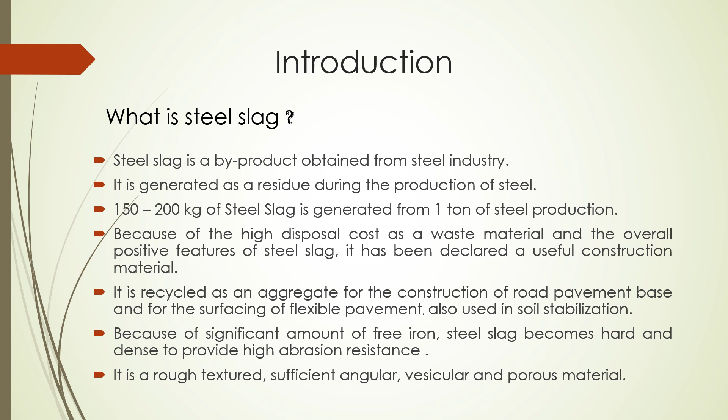Because of the high disposal cost as a waste material and the overall positive feature of steel slag, it has been declared a useful construction material. It is recycled as an aggregate for the construction of road pavement base and for the surfacing of flexible pavement. It is also used in soil stabilization. Because of significant amount of free iron, steel slag becomes hard and dense to provide high abrasion resistance. It is a rough textured, sufficiently angular, vesicular and porous material.

Steel slag aggregate. Let's discuss about aggregate properties. The properties that have to be evaluated for the suitability of slag as an aggregate relate to the chemical, physical and mechanical nature of the material. Let us discuss about some aggregate properties. Hardness. Hardness is the ability of a material to resist deformation, which is determined by a standard test where the surface resistance to indentation is measured. The most commonly used hardness tests are defined by the shape or type of indent, the size, and the amount of load applied.

Toughness. Toughness means resistance against impact load. In material science and metallurgy, toughness is the ability of a material to absorb energy and plastically deform without fracturing. Toughness is the strength with which the material opposes rupture.

The second one is high fines aggregate crushing test. The aggregate crushing test gives a relative measure of the resistance of an aggregate to crushing under a gradually applied compressive load. Third one is low aggregate crushing value. And fourth one is low Los Angeles abrasion value. Los Angeles is the apparatus that is used to measure the hardness. Next one indicates high density and crushing strength of the steel slag aggregate, because it is obtained from the steel industry. So its density is very high and its crushing strength is already good.

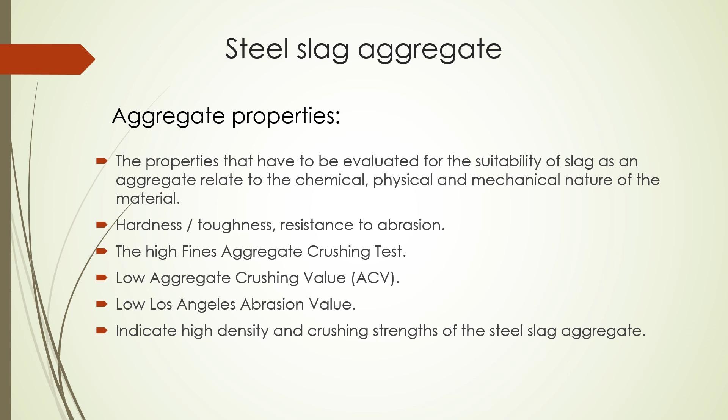Some other properties. First one is durability. Durability is the ability of a physical product to remain functional without requiring excessive maintenance or repair when faced with the challenge of normal operation over its design lifetime. Next one is resistance to stripping. Stripping is the separation of the asphalt binder film from the aggregate surface due to the action of water. Since steel slag has rough surface texture, that's why it improves the stripping resistance. This is very important in the prevention of the stripping of the binder and moisture damage.

Next one, steel slag with a pH of between 8 and 10 has a strong affinity to bitumen and therefore displays a greater degree of binder retention. Since we saw that its pH varies between 8 and 10, its nature is alkaline. That's why it has a strong affinity.

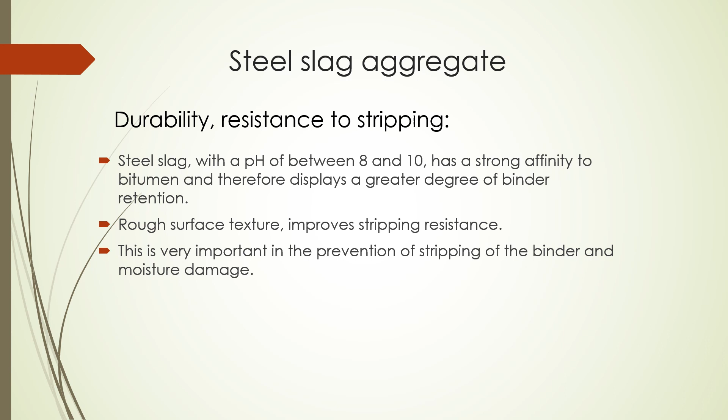These are some physical and mechanical properties of steel slag aggregate. The test conducted on bulk specific gravity: when the percentage of steel slag aggregate is zero, its value is 2.92, and when the percentage of steel slag aggregate is 50%, its value is 2.93. When the percentage of steel slag aggregate is 75, its value is 2.95. When the percentage of steel slag aggregate is 100%, the value of bulk specific gravity is 3.10. We see that bulk specific gravity increases with increment of percentage of steel slag aggregate.

Next test is absorption percentage. Its value is 2.3 when the percentage of steel slag aggregate is 0, and it increases up to 3.2 when the percentage of steel slag aggregate is 100. Next test is Los Angeles abrasion percentage. Its value is 14 when the percentage of steel slag aggregate is 0, and decreases up to 10 when the percentage of steel slag aggregate is 100. That represents the good hardening properties of steel slag as a road construction material.

Next test is flakiness percentage. Its value is 22.1 when the percentage of steel slag aggregate is 0, and it decreases up to 8.4 when the percentage of steel slag aggregate is 100%. And flakiness percentage should always be less than 15%. And we see that when the percentage of steel slag aggregate is increased, its value decreases. That is a good measure for a road construction material.

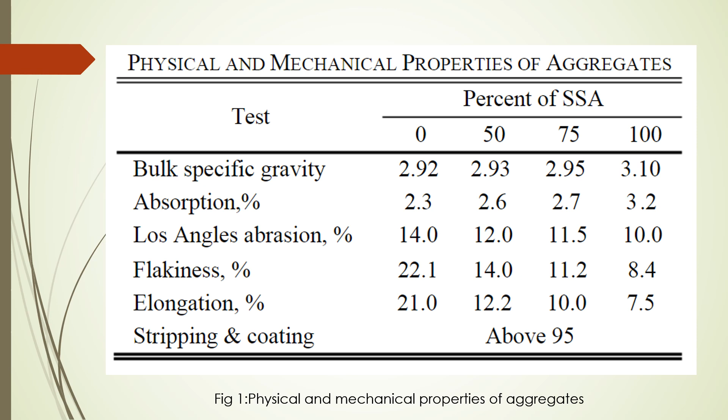Next test is elongation percentage. Its value is 21.0 when the percentage of steel slag aggregate is 0%, and it decreases up to 7.5 when the percentage of steel slag aggregate is 100%, and it should always be less than 15%. It is the same as flakiness percentage. Next one is stripping and coating. It is above 95. Here is the picture of steel slag aggregate, and we see that it has a vesicular structure.

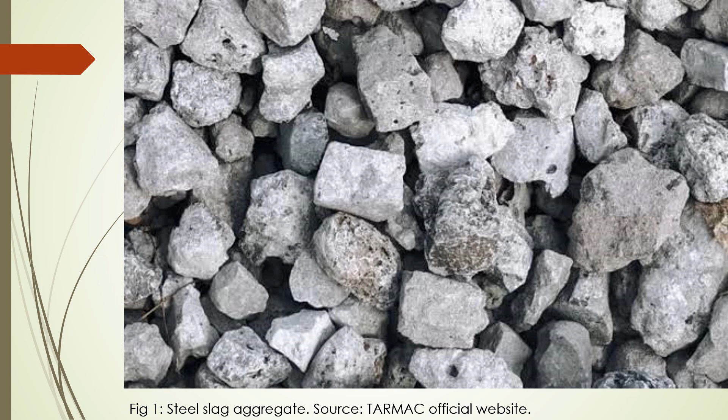Next one is steel slag asphalt mixture. Mix properties. Strength and stability. Since steel slag has a rough textured surface, high specific gravity, and proper interlocking due to angularity of steel slag aggregate, it results in better stability and resistance against rutting as well. It has a cubical shape, that's why the aggregate enables the formation of a strong interlocking structure within the asphalt mixture, which exhibits high stiffness and excellent resistance to permanent deformation.

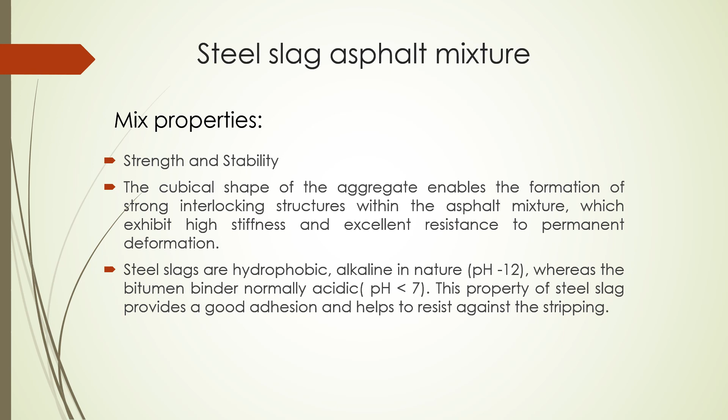Steel slag is hydrophobic and alkaline in nature, meaning its pH is approx 12, whereas bitumen binders are normally acidic, pH less than 7. This property of steel slag provides good adhesion and helps to resist stripping. Why do we need an alternative product? First one is change in traffic spectrum. Spectrum includes traffic data and the full range of street traffic data. Second one is change in traffic loading, meaning the total mass of passengers, luggage, cargo, including any non-revenue load.

Heavy traffic damage. That is rutting and shoving. What is rutting? Rutting is the formation of valleys in the surface or wearing course of asphalt roads and bridge decks. Shoving is a close cousin of rutting. Shoving is the presence of small mounds or ridges in the wearing course caused by horizontal stress. Intersections and highway off-ramps are common areas that exhibit shoving. Moisture damage means it has a good result in wet environments. And the next one is gradient.

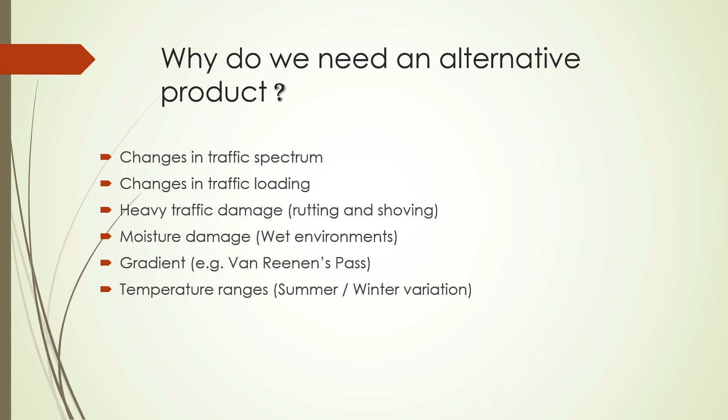And next, temperature range. It has a better result in summer as well as in winter season. When the road surface temperature begins to approach the softening point of bitumen, the high surface temperature causes the asphalt to become plastic and deform very easily, resulting in rutting. Whereas the heat retention property of steel slag is an advantage. That's why we use an alternative product. What are we hoping to achieve? First one is improved skid resistance, that is polished stone value.

Polished stone value of a coarse aggregate is an indicator that reflects the ability of coarse aggregate to resist the polishing action of tires and is used to characterize the ability of coarse aggregate to maintain a certain coefficient of friction against abrasion. SCRIM value. The full name of SCRIM is Sideway-force Coefficient Routine Investigation Machine. It is measured on various categories of road as well for 10 mm and 14 mm surface dressing. SCRIM value is used to measure the skid resistance.

Next one is it provides better stability and resistance against rutting. As compared to natural aggregate, it provides ideal durability, permeability, stability, and resistance against abrasion, cracking, and permanent deformation.

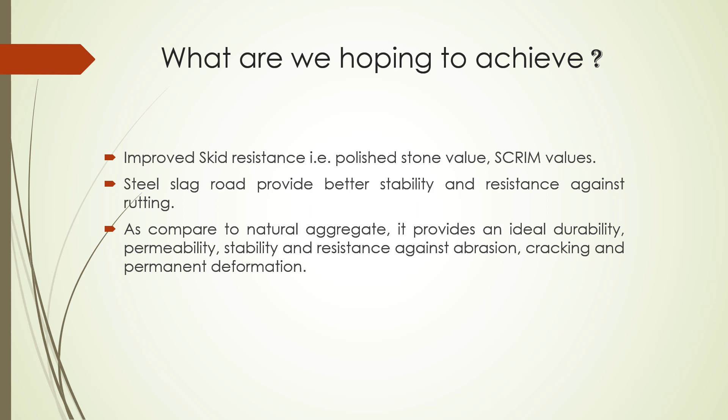Environmental consideration. Advantage. Since aggregate is obtained from natural rock, mining of the aggregate leads to the reduction of natural resource. The countries having limited resource of natural aggregate are thinking to save their natural resource for their future generation. A large area is utilized for the disposal of such solid waste produced by industries.

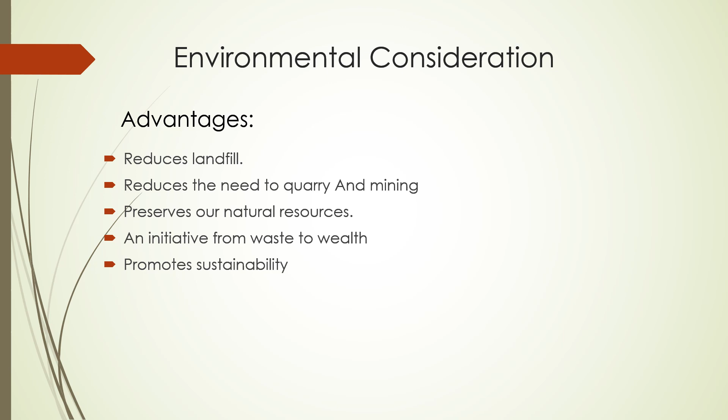Factors like environment, economic, technical, and efficiency of proper construction material have diverted the attention of researchers to other alternatives. As a result, they have explored a variety of recycled material which can be used in aggregate. And one of them was steel slag aggregate. It has various advantages, like it reduces landfill, reduces the need to quarry and mine, and preserves our natural resources. It is an initiative from waste to wealth and it promotes sustainability.

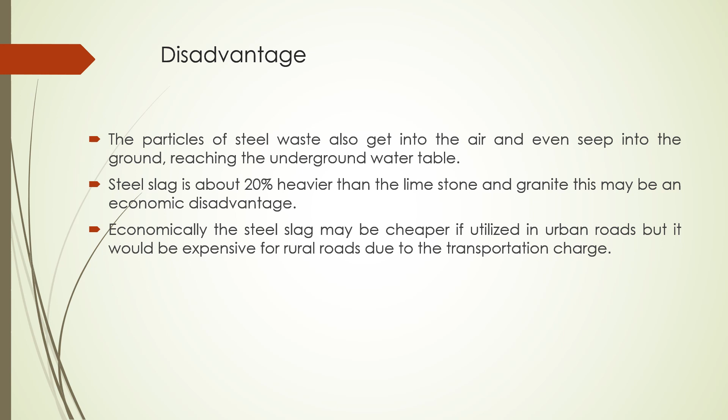Disadvantage. Steel slag has a negligible disadvantage as compared to its advantage. One of them is the particles of steel waste also get into the air and even seep into the ground, reaching the underground water table. Steel slag is about 20% heavier than limestone and granite. This may be an economic disadvantage. Economically, the steel slag may be cheaper if it is utilized in urban roads, but it would be expensive for rural roads due to transportation charges.

Let us see some case studies. First case study. It is conducted in Germany. According to the National Slag Association, iron and steel slag have been used in engineering construction for more than 150 years. It is being used as aggregate in replacement of natural aggregate, for bonding applications instead of Portland cement, fill material, railroad ballast, and subgrade soil stabilization. In 1998, up to 97% of the total generated steel slag was used in different ways for the construction of high traffic roads of Germany.

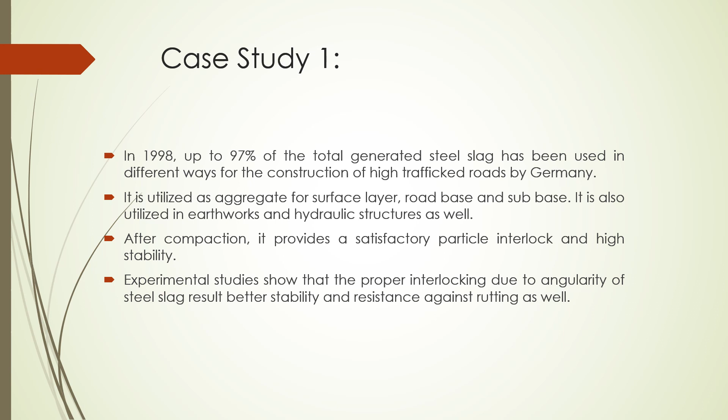It is utilized as aggregate for surface layers, road base, and sub base. It is also utilized in earthwork and hydraulic structures as well. After compaction, it provides satisfactory particle interlocking and high stability. Experimental studies showed that the proper interlocking due to angularity of steel slag results in better stability and resistance against rutting as well. It has various advantages, like proper skid resistance as well.

Second case study. It is conducted in Gujarat. In India, Surat has become the first city in the country to get a processed steel slag, means industrial waste, road built as part of a joint venture project by the Council of Scientific and Industrial Research, that is CSIR, Central Road Research Institute, that is CRRI, Union Ministry of Steel, Government, etc. 1 lakh ton of processed steel slag was used. Steel slag was collected from a manufacturing plant that is situated in Hazira. The road has been jointly made with CRRI, CSIR, and AMNS, means ArcelorMittal and Nippon Steel.

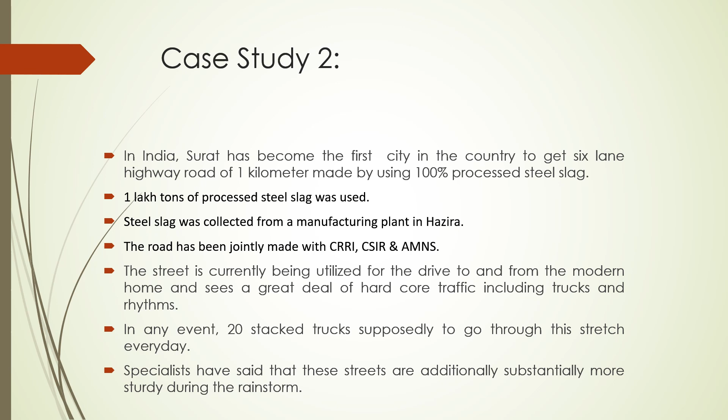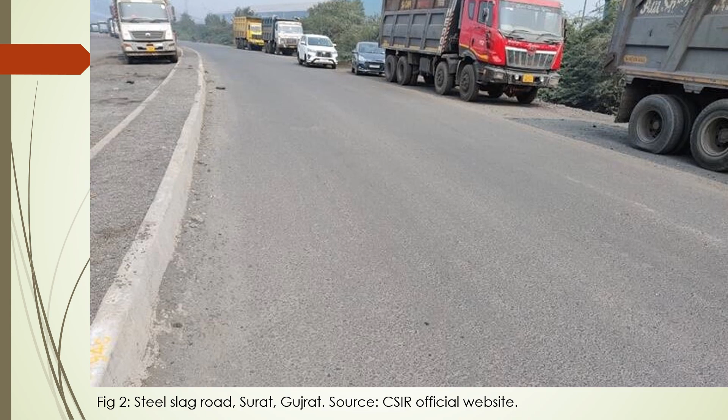The stretch is currently being utilized for the drive to and from the modern home and sees a great deal of heavy traffic, including trucks. In any event, 20 stack trucks supposedly go through this stretch every day. Specialists have said that these stretches are additionally substantial and more sturdy during the rainstorm. It has a better result as compared to other bitumen binder aggregate. Here is the picture of the steel slag road that is constructed in Surat, Gujarat, and I obtained it from the CSIR official website.

Here is the sum of the conclusions. Steel slag produces a high quality aggregate which can benefit asphalt material in a number of ways. Steel slag aggregate can outperform natural aggregate in terms of shape. It has a cuboidal shape. That's why it has proper interlocking. Its specific gravity is very high. That's why it provides better stability and strength. Resistant to crushing. Next one is skid resistance.

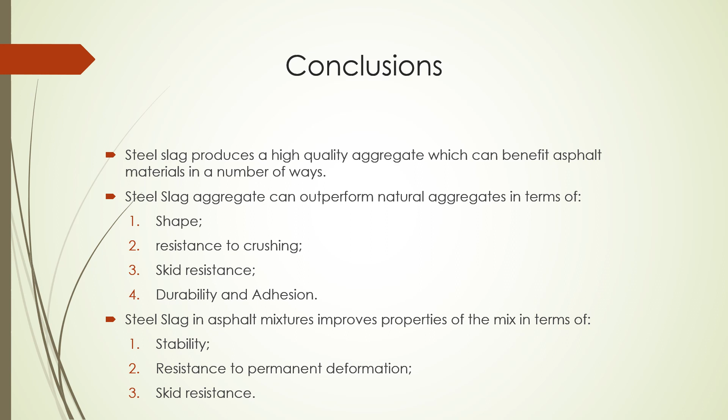Since its pH value is more than 12, or approx 12, and the pH value of binder is less than 7, that's why it has a greater skid resistance and it has a better result in wet moisture. Durability and adhesion. Steel slag in asphalt mixture improves properties of the mix in terms of stability, resistance to permanent deformation, that is rutting, shoving, etc., and the skid resistance.